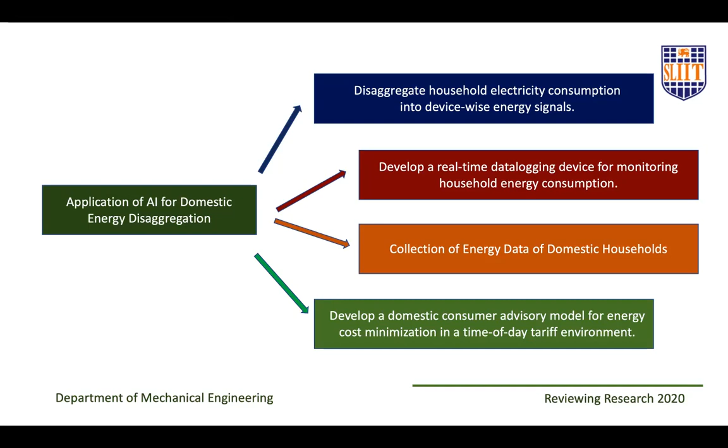Under this area, we are trying to see how we could apply AI for domestic energy disaggregation, and we are looking at how we could disaggregate the household electricity consumption signal into device-wise energy signals. Then how we could develop a real-time data logging device for monitoring household energy consumption, and to collect energy data from domestic households using the device that we develop, and finally to develop a domestic consumer advisory model for energy cost minimization for various households that use a time of day tariff scheme.

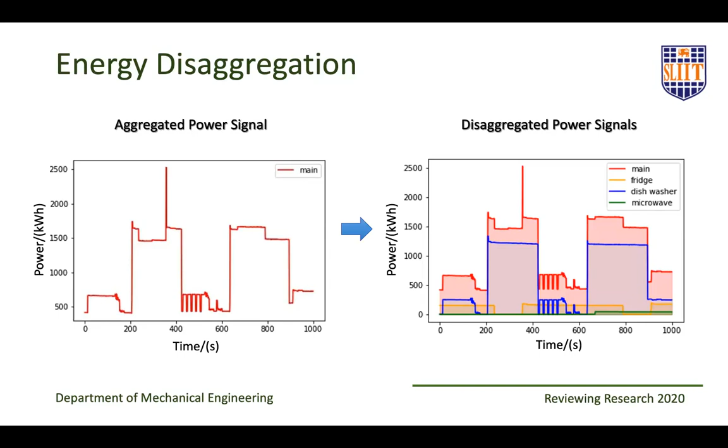So here, what is energy disaggregation? We have the household energy signal. Now, without using individual sensors, we are trying to break this signal into appliance-wise signals. So at any given time, if you apply our algorithm, we will know exactly which device is consuming what amount of energy. So under this main theme, we have developed a neural network to disaggregate the energy signal into individual device-wise signals.

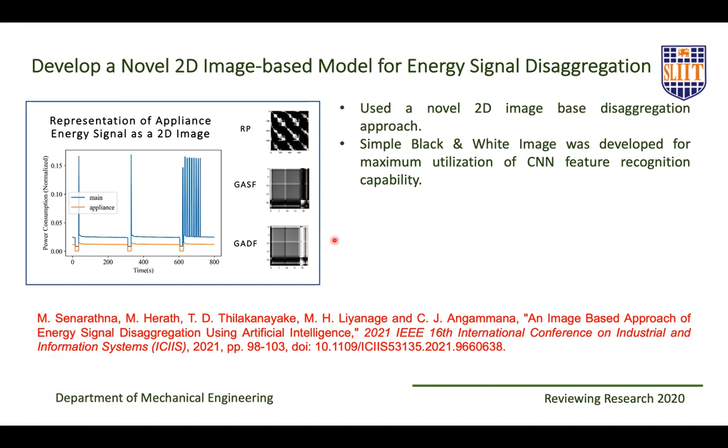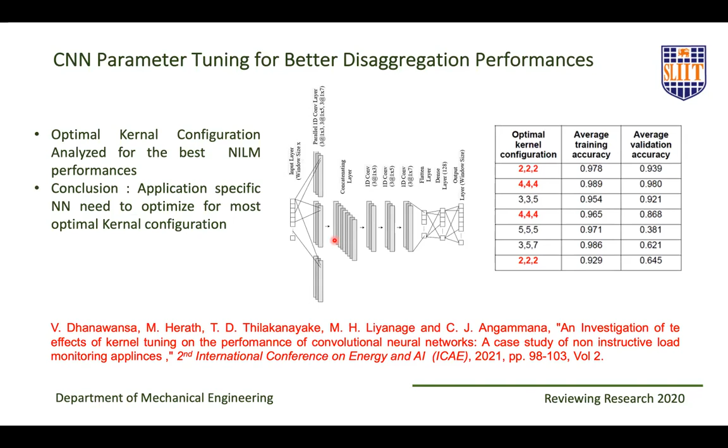In one of the studies, we convert 1D data into images, and we use it in the neural network model to obtain results. And this has shown very promising results, and the results were published in the ICIIS conference, which was held at the University of Peradeniya this year. Then we also considered various parameter tuning options. We considered different kernel shapes in our disaggregation model, and we have also published a conference paper out of the results, and it was presented in an international conference.

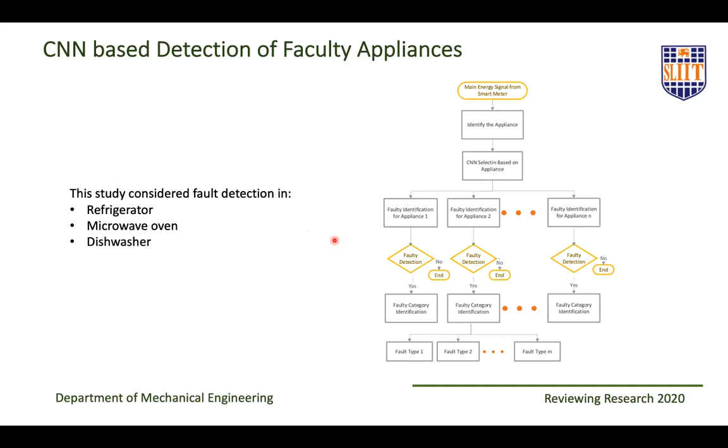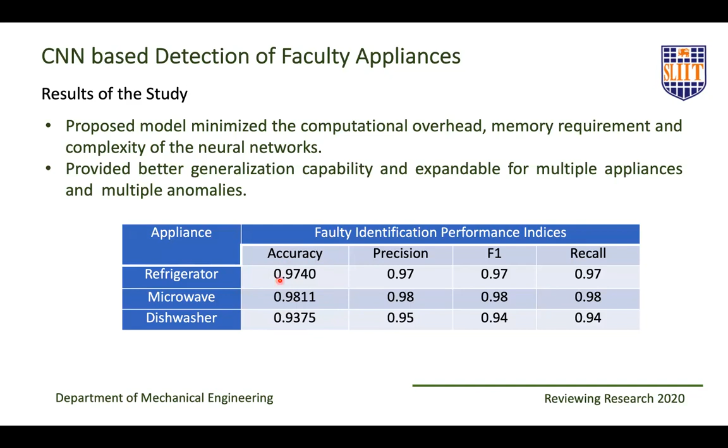Then we have also developed a method for appliance-wise fault detection. Here we try to detect variations in the energy activation signal of various appliances. We have developed the framework, and we have actually tested it, and the results show that we have an accuracy of more than 93% in the model, and we are planning to publish the results in a conference.

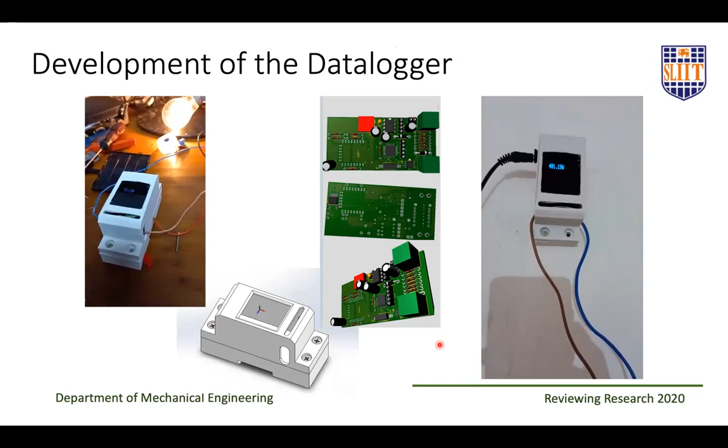We have developed a data logger for data logging and developing a data set for domestic households. The work on the data logger is almost complete. We will use this data logger for collecting domestic energy use data so that we could test whatever we develop with actual models.

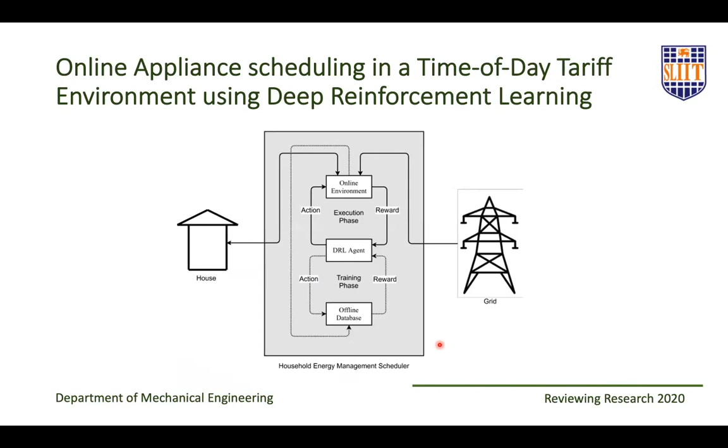Then we are also working on developing an online appliance scheduling scheme for domestic households using deep reinforcement learning, which is a very novel technique for domestic energy optimization. It is based on action and reward, so once the system is developed, it will give the consumer an idea about how he should schedule his appliances to reduce his energy cost.

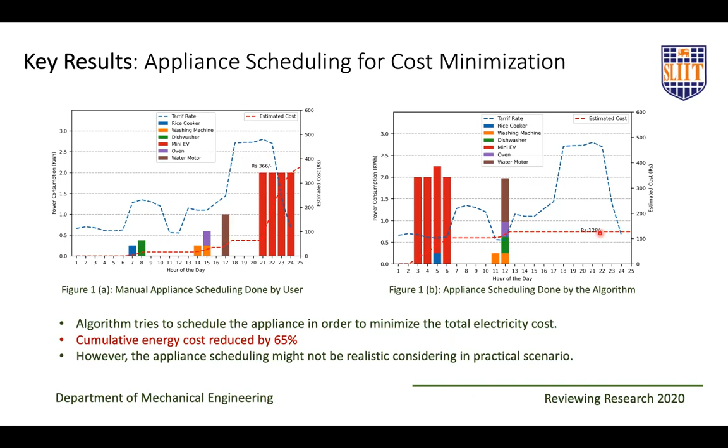Here you can see if you use the normal method without scheduling, the estimated electricity cost per day will be about 366 rupees. But if you carry out proper scheduling, it could be reduced to 128 rupees in a typical household which has large energy consumption.

During the next year, we are planning to complete several tasks. First, we are trying to develop a system for self-learning, real-time energy consumption using neural networks and reinforcement learning. We are also planning to use the device in households to develop a domestic energy consumption dataset. Also, we are planning to train and test the deep reinforcement learning model for cost minimization of household energy. Finally, we are planning to take our research findings to the industry, so we are looking for collaborations with CEB and PUCSL.

Last year, due to COVID and other reasons, we couldn't do whatever we planned, but in the coming year, we hope that it will be a better year for us. And we have planned several journal and conference papers under this project.

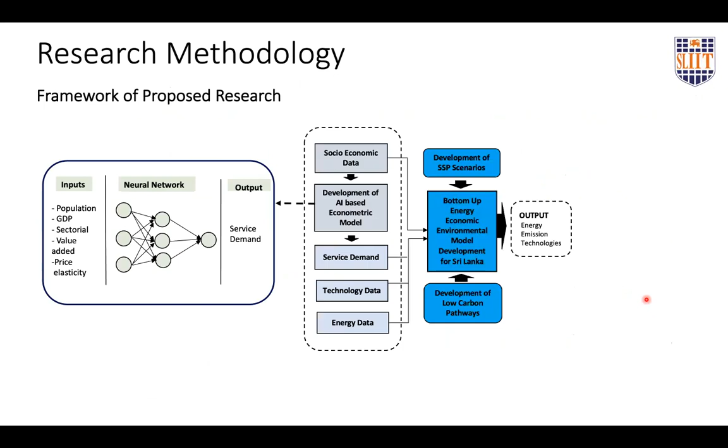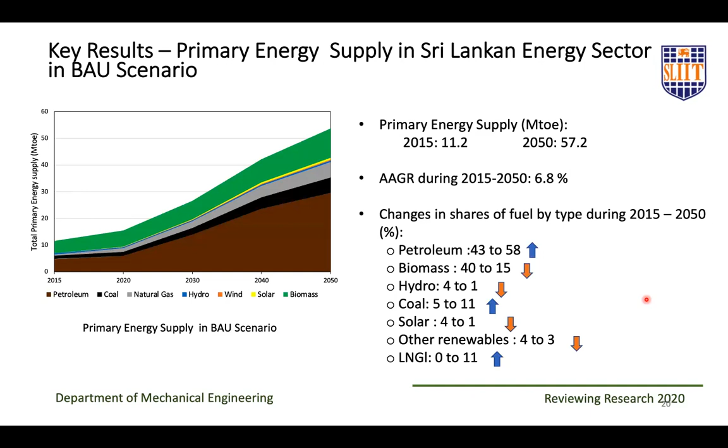The next theme is energy, economic and environmental modeling for climate change mitigation. It is carried out by Ms. Gayashika Fernando, myself, Professor Rahul Atalage, Professor Chandana Pereira, and Professor Shiromi Karunaratna. Here we have developed a framework to model the energy consumption of Sri Lanka and predict future energy demand. From our model, we can predict the total primary energy demand till 2050. And with this energy demand, we can also predict carbon dioxide emissions.

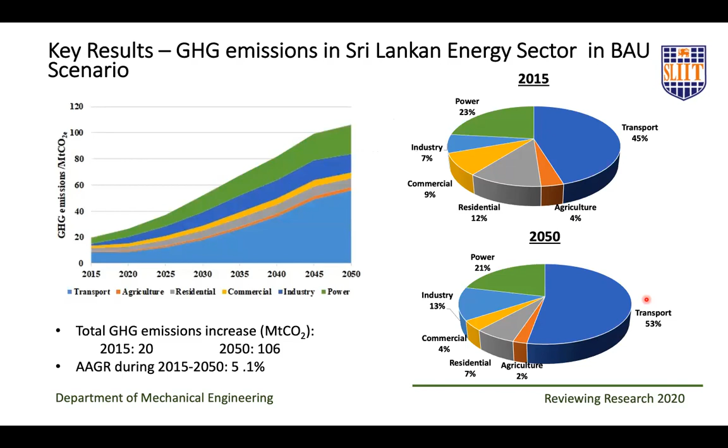Using the model, we could develop various climate mitigation scenarios. This year, we developed scenarios to attain carbon neutrality in Sri Lanka. This is a very hot topic; people are trying to go for low carbon pathways. So here we considered a base case with different low carbon scenarios, with options such as a high share of renewable energy in power generation, advanced and efficient technologies, alternative fuels such as biofuels and LNG, nuclear-based power generation, and advanced carbon capture storage in the future.

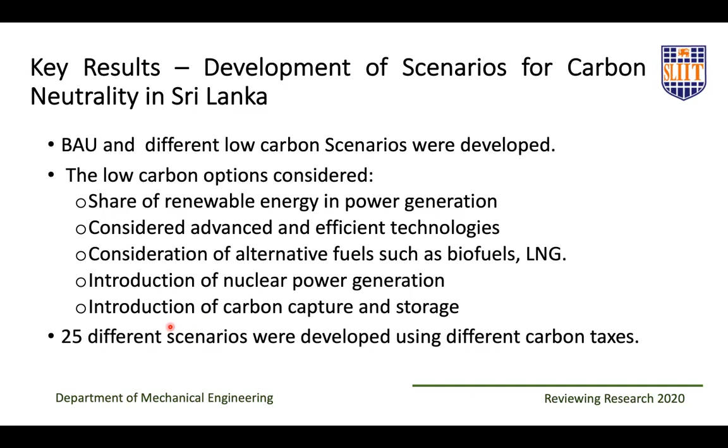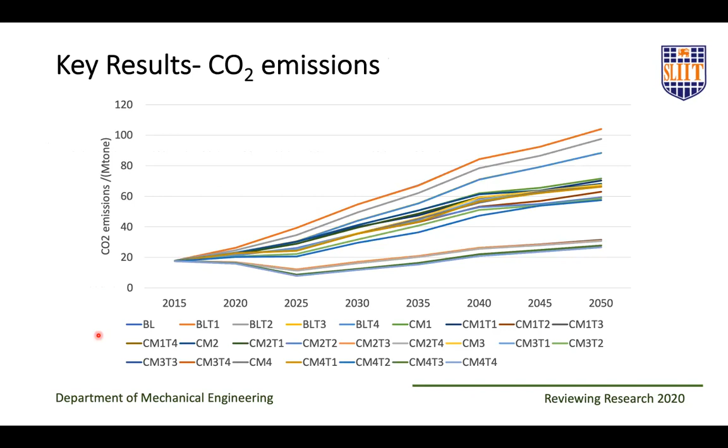Using these options, we developed 25 different scenarios, and we projected the trajectory of carbon dioxide emissions. Based on these projections, we can select exactly the trajectory that we want to follow, and to attain that trajectory, this study will give what type of policy options we need to adopt. This year, we plan to complete the development of different emission pathways according to the international IPCC guidelines on shared socioeconomic pathways.

Then we are planning to estimate the marginal abatement cost of CO2 reduction for Sri Lanka. Also, we are planning to promote collaborations with the Sustainable Energy Authority, Climate Change Secretariat, and the CEB. Last year, we couldn't do as much as we expected, but in the coming year, we are working on several high index journal papers and conferences, and we are also looking for several collaborations.